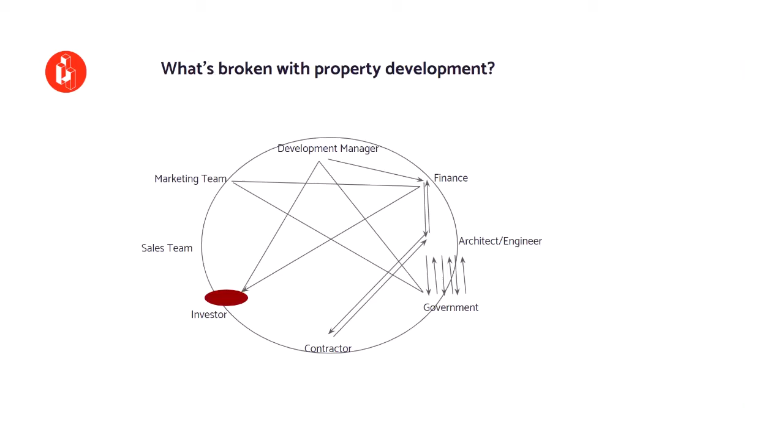How do you manage your risk? What we're seeing on the screen is slow. Time and money restrict the number of iterations tested, which limits the amount of analysis done. It's error prone. Every time data is double handled, it introduces unnecessary risk. And it's wasteful. This project can be stopped at any point, but every step costs time and money.

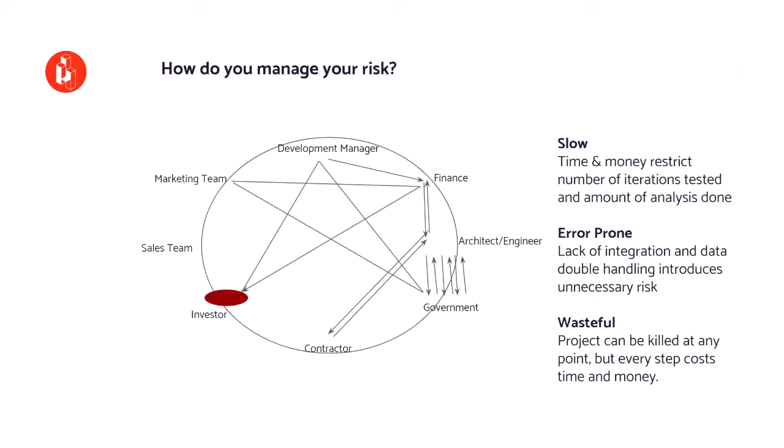In the next 8 minutes, I'm going to show you how this process is done on the Giraffe platform.

In this video, I want to show you how Giraffe can be used to identify profitable sites and create opportunities really quickly and collaboratively with your team.

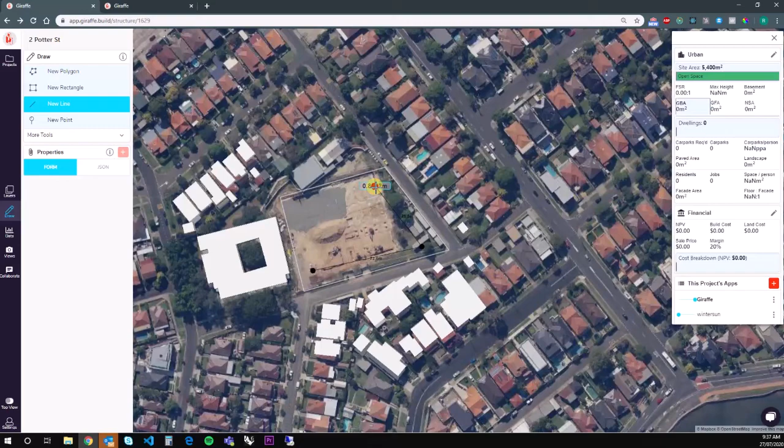So we normally have these kind of conversations on the phone. Let's say a broker has brought me this site in a geography that I operate in, and it's got the potential for water views. We normally do this kind of thing on the phone and start massing up live. There's no back and forth, no 'I'll get back to you in a couple of days.' We just get going. So we both think there's an opportunity to do a flying V facing towards the water. That'll give this facade and that facade both water views. That's going to maximize the value for us.

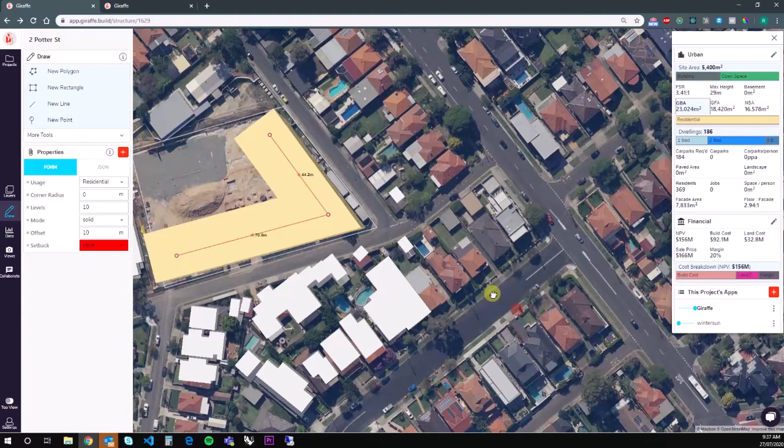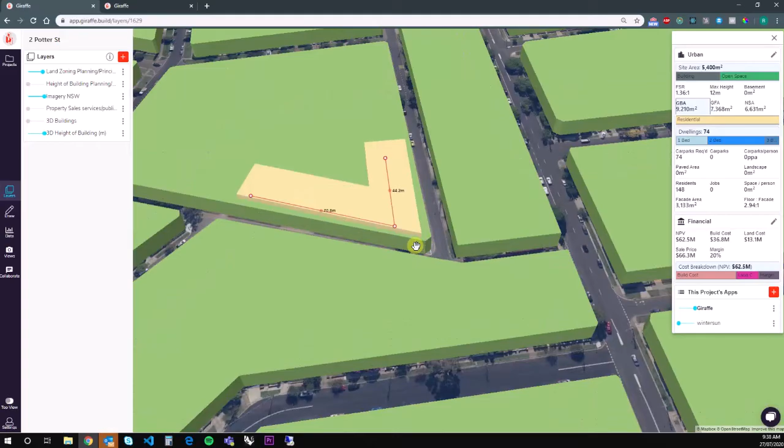So if I create a 20-meter residential floor plate in that configuration, I can see that we can get 186 dwellings, but that's at 10 levels, which unfortunately we're never going to achieve. We've been in conversation with this council for a long time, and we know that 4 is about right. I can turn on the zoning data, and I can see that 4 actually is above the mandated height limit, but we do understand that approvals have been granted at that 4-story limit. So with this configuration, we're getting 74 dwellings, and we're back solving for the land price of 13 million, and the broker's saying that that's probably a bit low.

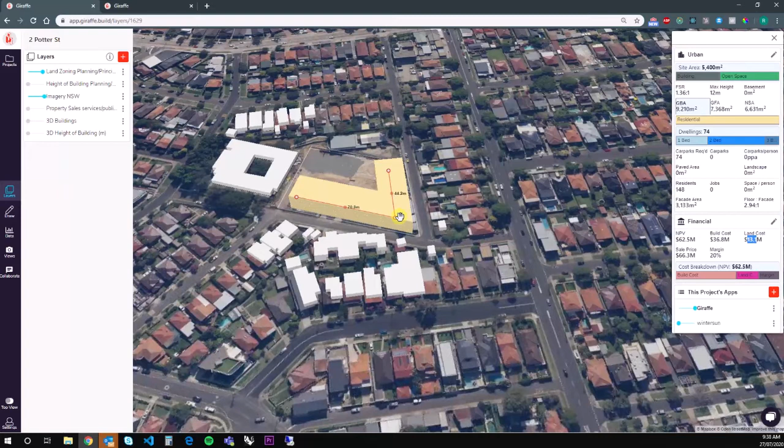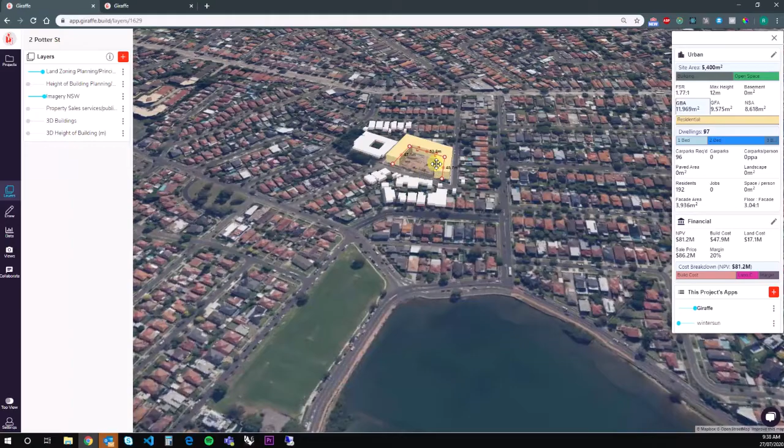The target really needs to be about 100 dwellings, so we're going to try another option, an upside down U shape, and that gives us 97 dwellings. It looks okay, it looks like we can still maintain a lot of those water views from these apartments and these apartments. There'll be some compromise here, although potentially they'll get water glimpses. So the view is less optimal, but there's far more units, and I think this can probably be made to work.

The other thing that Giraffe does is it contextualizes all your projects in the browser all the time. So this is the project we were just working on, and I can zoom out and see other projects that I have on the go. Our marketing department also uses Giraffe to keep track of our competitors. So I can see that Developer X has 110 units remaining up here, but 91% sold at the moment. That's good, that's indicating a strong market, so it gives me a little more confidence.

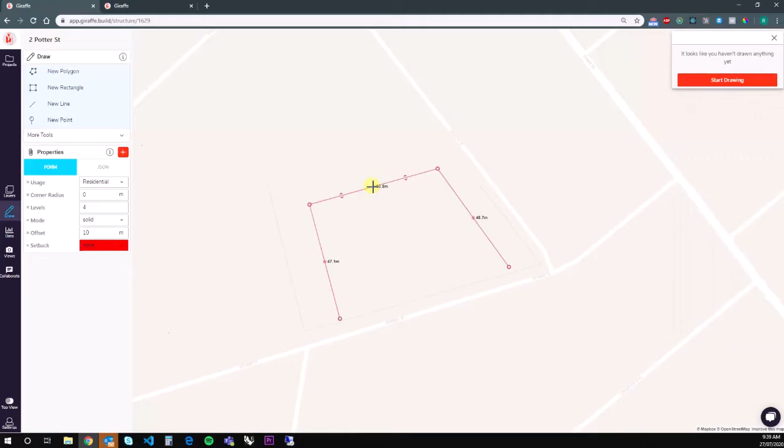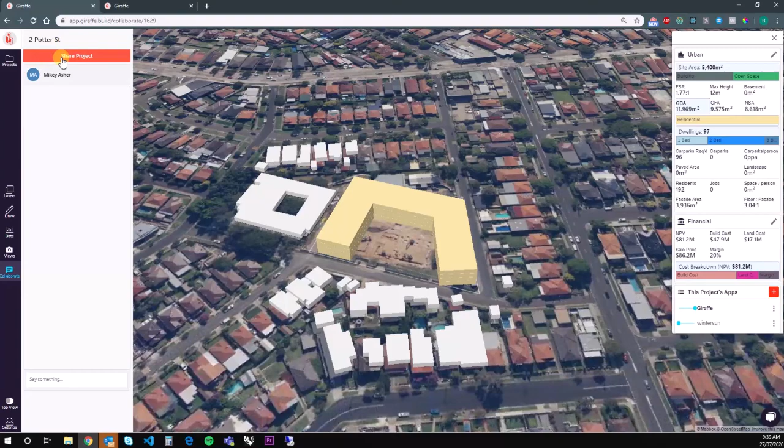So in a couple of minutes, we've hammered out a position with the broker on the phone, and what I'm going to do now is share this with my architect just to run it past her and see if there's opportunities I've missed or mistakes I've made. The best kind of de-risking is getting a smart, trusted person to have a look at it. So I'm just going to do that with our architect Lucy, and she'll have a look.

So I share the project with her, and then I'm going to say, 'Hi Lucy, please have a look. Yield needs to be 100 units.' She'll then get this notification from Giraffe, and she'll jump straight into the project. There's no dilly-dallying, no back and forward over email or phone call spending time just explaining which site to look at. She'll see my vision, and next time I log in, hopefully I'll have an updated building.

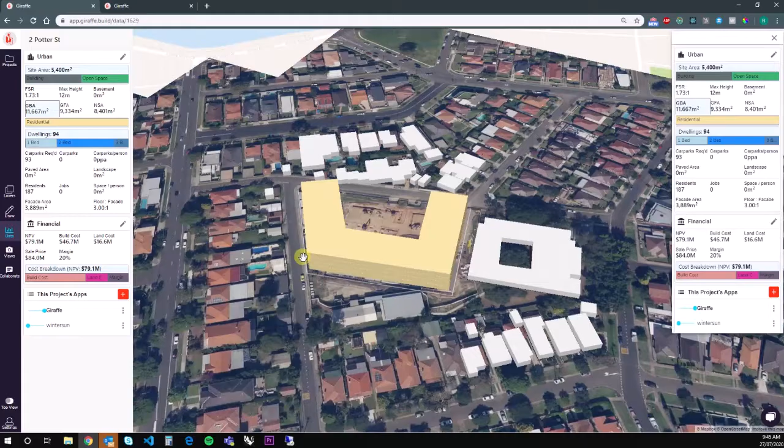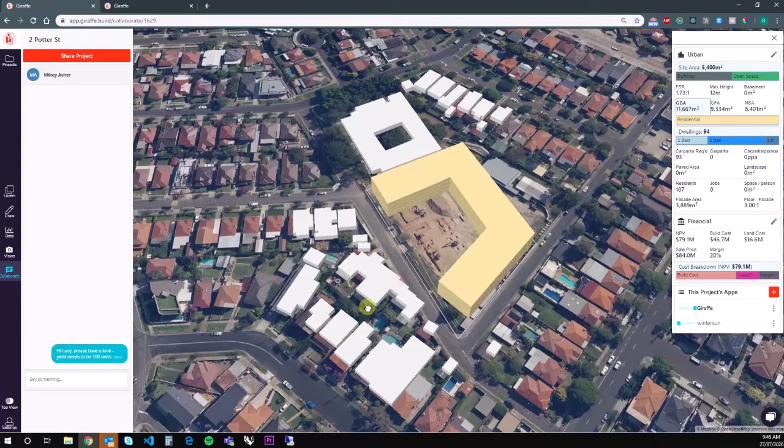In this video, I'll take the role of the architect. I got an email notification from Giraffe, from my client, jumped into the project and saw the first sketch, which I start to understand. I can see the vision, I can see the approach, and 100 dwellings if I read the chat is what they're after.

I have two immediate risks for this project. The first is that the courtyard is facing south, and that will be driven by the views, so we can deal with that. The second is that this curtilage is just not comfortable at all. This building is crowded in by ours. That's not going to get approved.

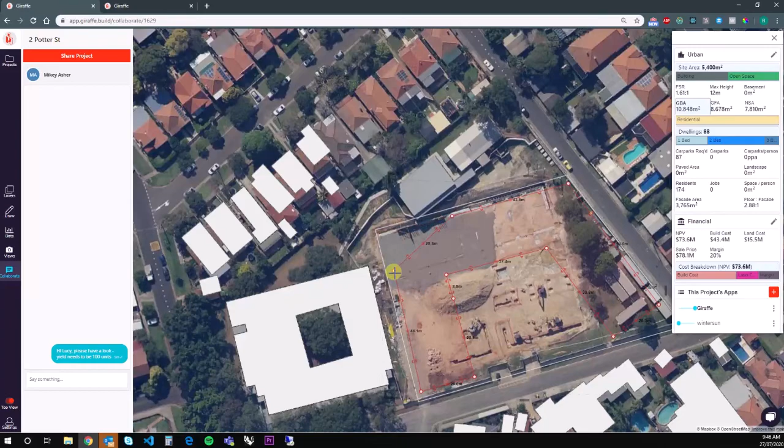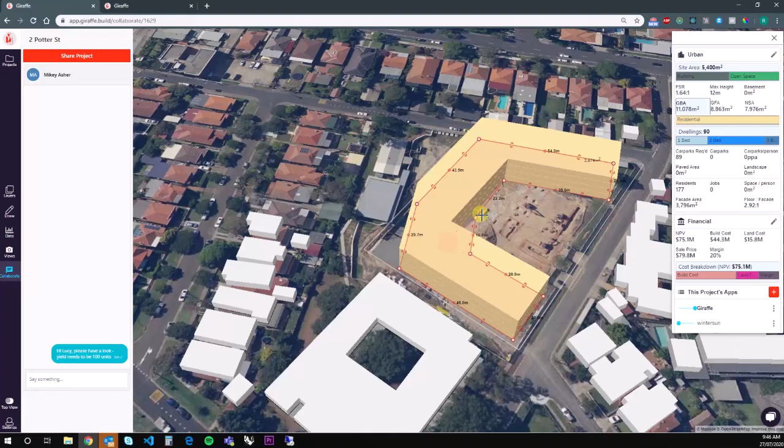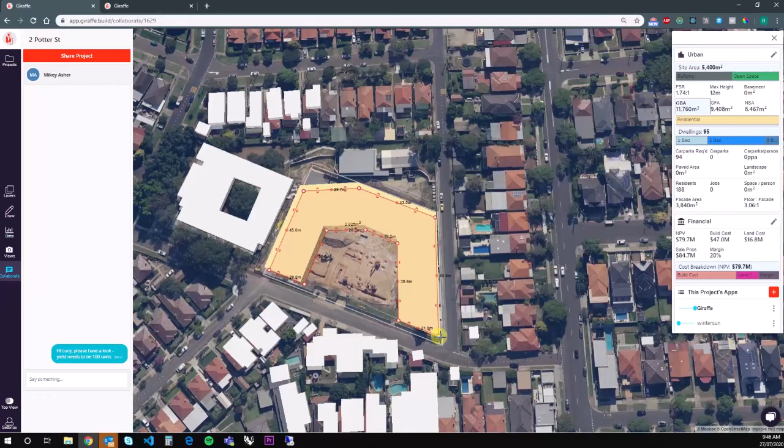So the first thing I'm going to do is pull that back and align this facade with that facade, build some approvable envelope. This has taken our units down to 90, which is a bit of an issue, so I'll see if we can make the area back by stretching the building like this. We're starting to get this crafted shape, and I can see we can get some more area there, but even doing that, we're down to 95, 94 dwellings.

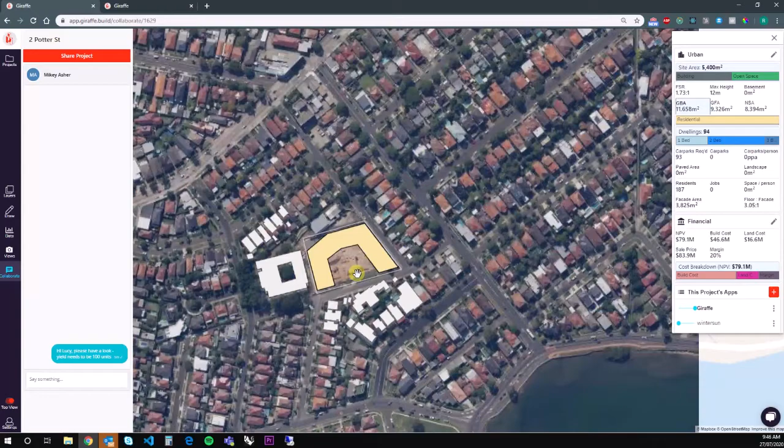So I see an opportunity probably to close the courtyard off with a small building to the south that's shorter than these, maybe 1 or 2 stories, because the bottom levels here aren't going to lose their view anyway. So let's add a little residential building to the south of 2 levels, and hopefully that's going to get us to the yield we need.

Alright, look, that's good. So we've got to 100 units. I'm sure we can fit in a few more at this level at this time. That's gold. There we go.

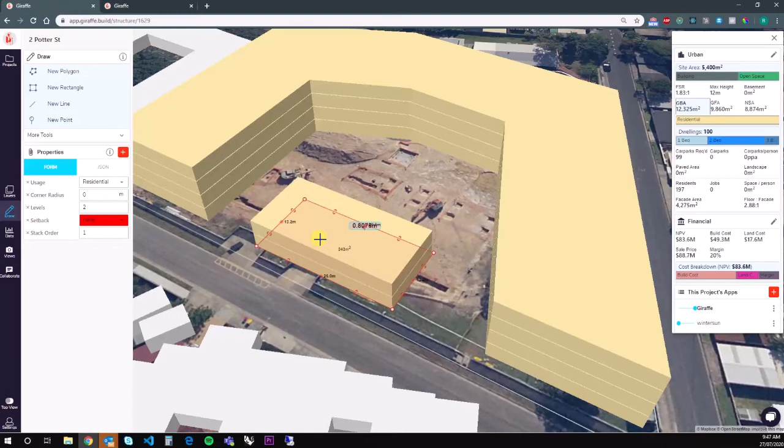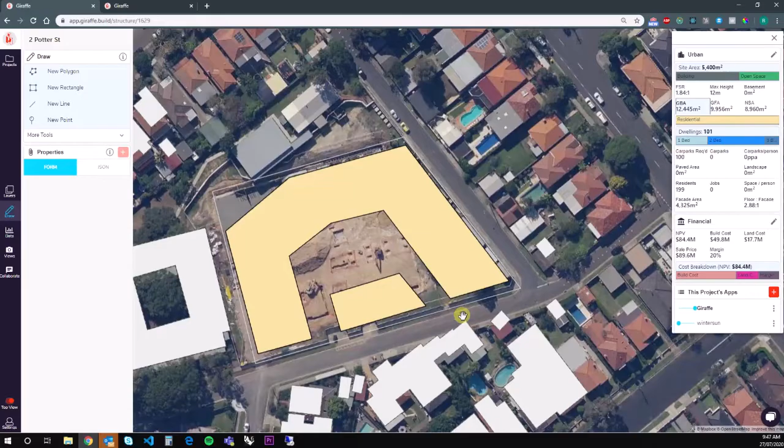Okay, so we've got ourselves a mass. I've refined a bit of this corner. I've added a little thing here, but I think this is approvable now. That's my considered opinion. The risk now is the solar, and this is where Giraffe is really awesome.

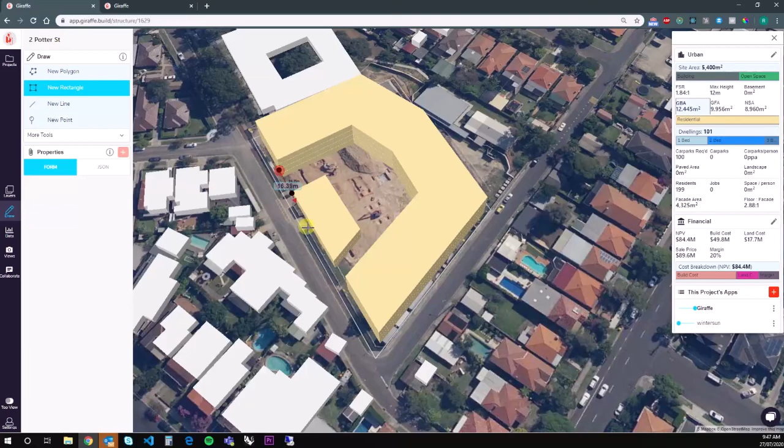What I've got here is a winter sun app, which I'm just going to run, and what that app's going to do is just do a solar analysis on this building. Whilst I'm waiting for that to execute, I'm going to take this to a stat planner, and to accelerate that conversation and get best value out of their time, I'm just going to put some landscape and some prettiness on the project. So I'm going to put a lawn there, and actually I've been interrupted by the app, which is fantastic.

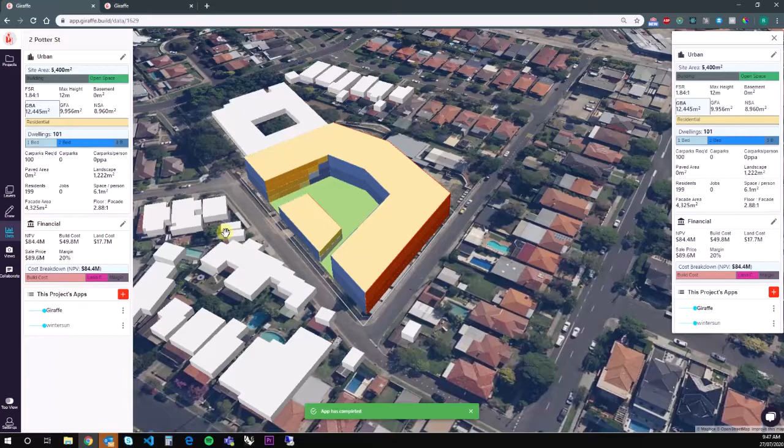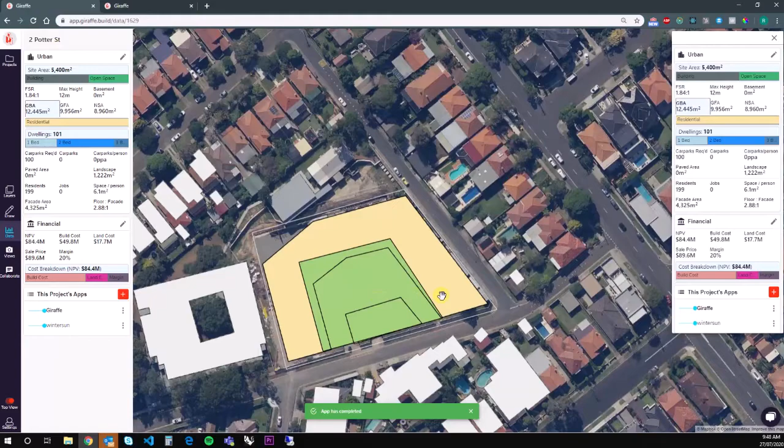So we can see in this view, this facade here is getting sun. Obviously these southern facades are not at all, which is going to be potentially an issue. This facade, I was hoping to see some sun on it, but it's actually facing south enough that it's not going to get any. But these north facades are getting really good sun, and I know given this site we'll be doing gun barrel apartments, so I think we can make it work. I'm not actually concerned with that risk because of the solar access to that north.

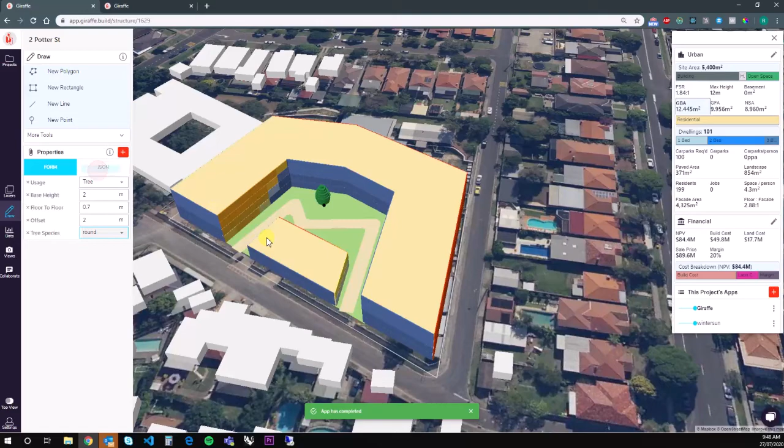So let me finish this park, and then I'm going to share this with the stat planner, the statutory planner, make sure that what I'm seeing is in line with what they see as approvable. With 3 eyes on the project, our client can be very, very confident that there's no unforeseen or unimagined risks.

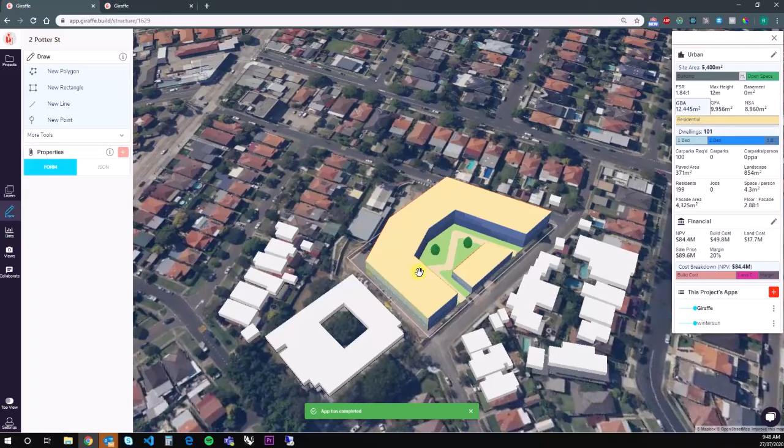And this is not a computer doing this. This is experienced, trusted consultants, and we actually know the government and the approving authorities we deal with all the time, and we've got projects in this area. So what you're looking at here is considered, and we're only in about minute 8. We're less than 10 minutes into this project, and we've already had 3 pairs of eyes on it, and we are confident that the mass that we see here can be made to work.

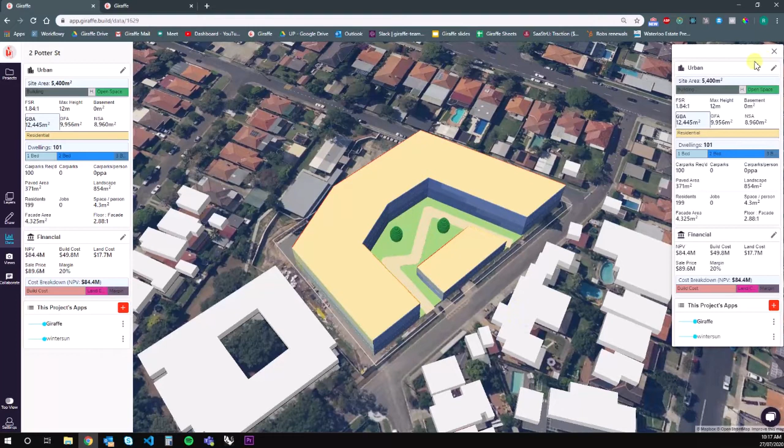Final step is for the financial team to have a more detailed look at it. There's 2 things that they can do. The first is change parameters here in Giraffe, so they can change the mix of 1, 2 and 3 beds, as well as the sizes. And as they do that, the number of dwellings changes in real time, so that they can understand what's going on.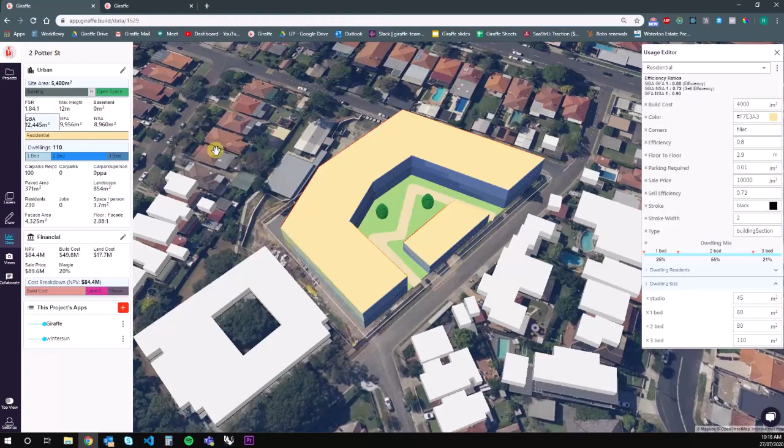So potentially we can actually get more dwellings if we drop the 2-bed down to an 80 square metre, and the 3 beds as a proportion down to only 11%. We're up to 115 dwellings.

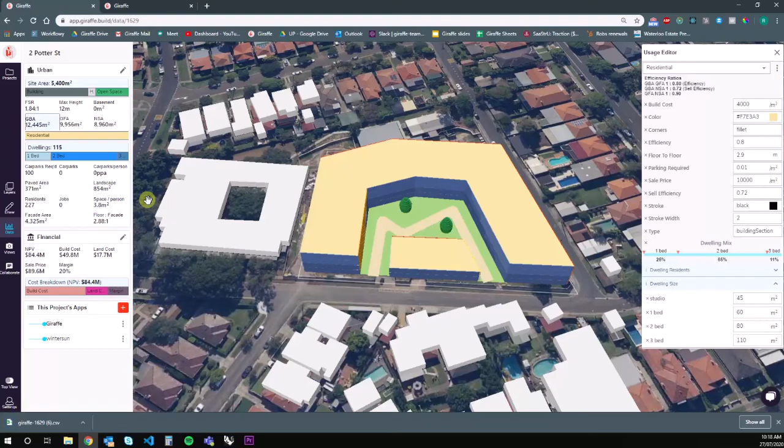Once they've done that, which is good - if it was bad, if we'd fallen below the 100 unit count, we would have to do another iteration, bring the architect back on board. But since this is the right direction, we can download a CSV of all the data, all the parameters, mix, size, price, efficiencies, and that can be ingested into the Excel document that the team works in natively.

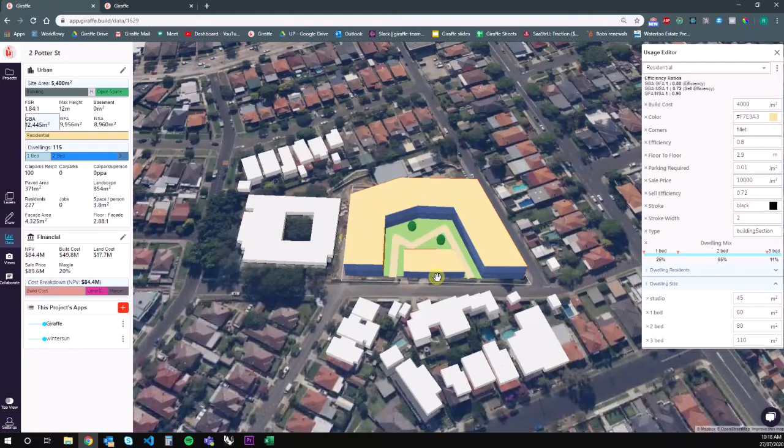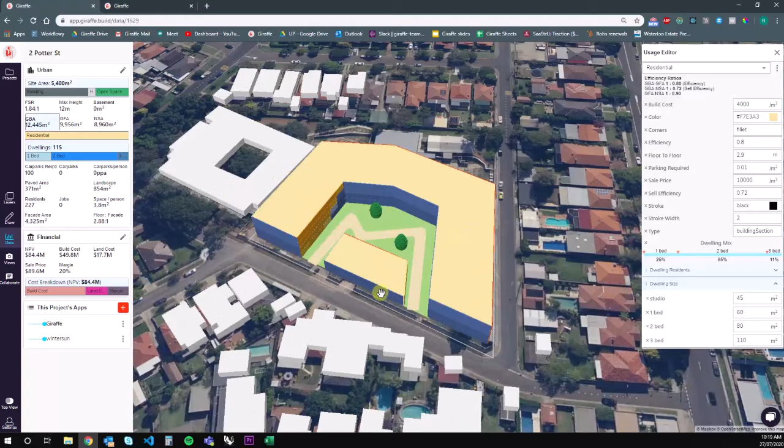So Giraffe always talks to the existing workflows within the firm and never traps you, always accelerates you. And that's how the deal will gain speed and legitimacy and be communicated most effectively to bankers, finance, marketing department, sales, the government, the architect, and everyone who will be affected by it. So this is our vision of city making and building making in the best possible way.